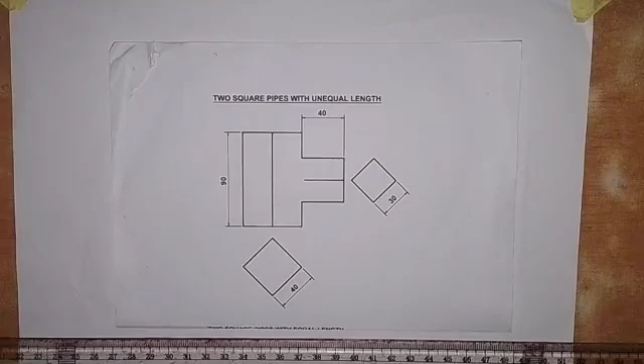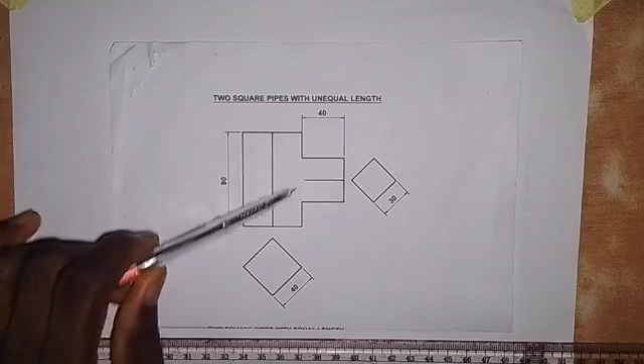Here we are still working on the construction of the line of intersection of two intersecting solids, and for this one we are looking at two square pipes with unequal length. Looking at what we have here, the square end of this vertical square pipe is of length 40 millimeters, while its height is 90 millimeters. For the horizontal square pipe, the side of its square end is 30 millimeters, while its length from here to here is 40 millimeters.

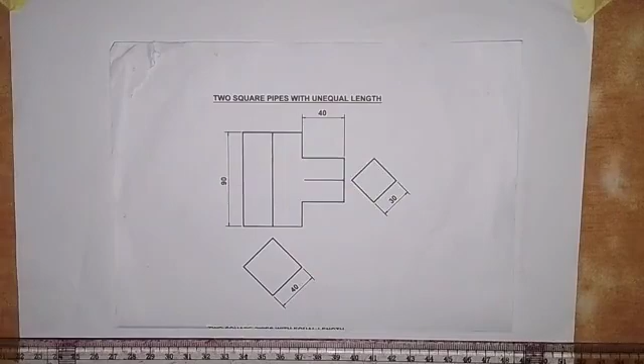So we are going to replicate what we see here, then bring out the line of intersection, and then also complete the plan, because the plan that we see here is that of the vertical pipe. So let's see how we are to draw the line of intersection of these two square pipes.

The first thing we are going to do is draw a vertical center line. Here we have the vertical center line; the center line is drawn with a long chain line. I want to extend it down here. Then we come up here and draw the horizontal center line, which goes like this. I will extend to this side a bit, and then take it to this side. So we have it.

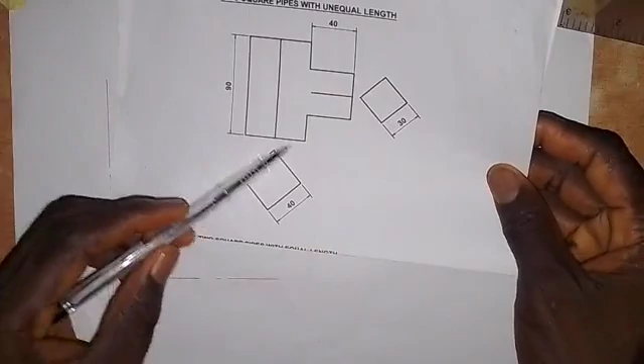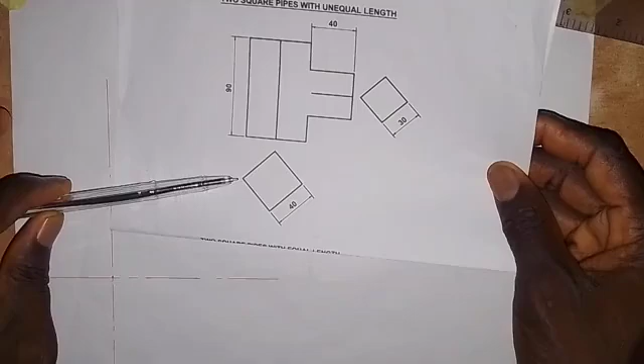The next thing, because of the way this pipe is positioned with the square end like this, for us to construct this square we have to calculate the length of diagonal of this square pipe. I've done something like this several times. What you need to do is determine the length of diagonal from here to here or from here to here; they are equal. To do that, you have to make use of Pythagoras theorem.

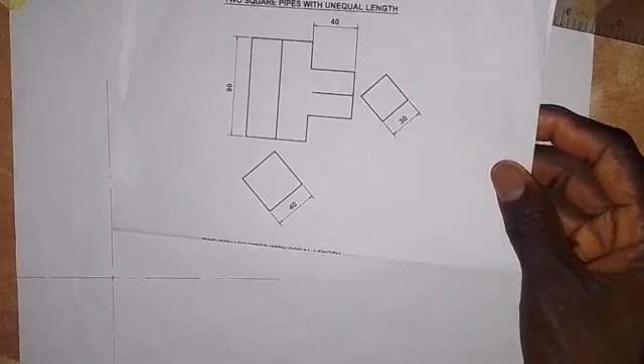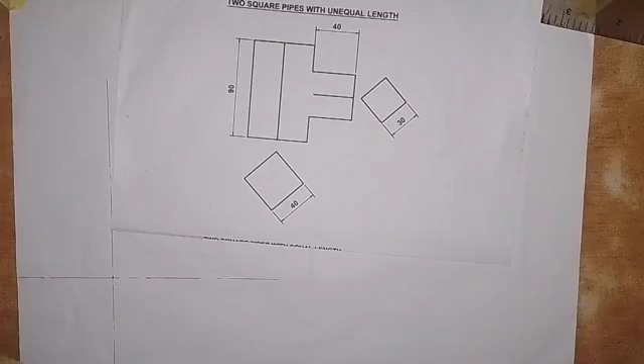So you find the sum of the squares of this length. That is square root of 40 square plus 40 square, and by my calculation that is 56 millimeters. 40 square plus 40 square gives us 3,200, and the square root of 3,200 gives us 56 point something. So just take it as 56 millimeters. That's what we are to use.

Now divide that 56 by 2, and that will give us 28. So we take a measurement of 28 millimeters. Use your compass to take that 28 millimeters, then put the pinpoint here and make an arc here on this line, make an arc here on this line, make an arc down here on this line, and make an arc here.

We are going to join these points together to draw the square end of the vertical pipe. So we join this together, and I will join these 2 points together like this. Then I will also join these 2 points together like this, and these 2 points, I will join them together like this.

If we take a measurement of the distance from here to here, the length of the square end of the vertical pipe, you will see that this is 40 millimeters. That is how simple it is to construct a square positioned in this form. Now the next thing is we come up here, just a little distance up, and draw a horizontal line.

Next, from this point on this square, draw up a vertical line like this. Then we come to this point here and also draw up a vertical line like this. I'm going to extend this up because the height of the vertical pipe is 90 millimeters, so I need to take this up a bit. I also need to take the center line up a bit.

So the next thing that we are going to do is construct the square end of the horizontal pipe; its length is 30 millimeters. So we do the same thing as we did here by calculating the length of diagonal from here to here and from here to here, making use of Pythagoras theorem, and that will be square root of 30 squared plus 30 squared, which gives us square root of 1800. So square root of 1800 will give us 42 point something. Okay, so just take it as 42. So we now divide that 42 by 2, and that will give us 21.

So take a measurement of 21 millimeters on the ruler like this. So here I have 21 millimeters. So put the midpoint here. Okay, we are just drawing only two sides, not the whole of 4. So we just need only 2 of them. So we have this and then we have this. So in this case now, we just want to use this to get what we want.

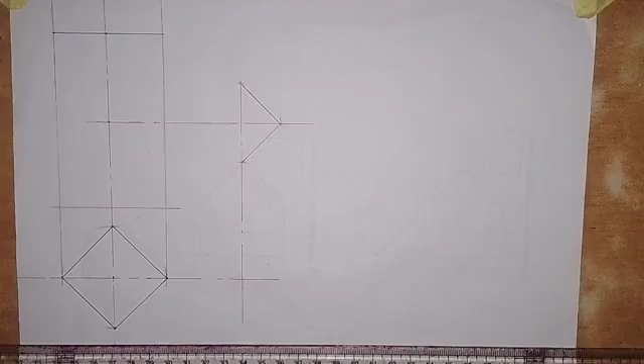I'm just going to join these 2 points together. I'm not going to make it a thick line. Okay, so we just need to join this together like this. Okay, and then we join this also, from here to here. So if you take the measurement from here to here, this is 30 millimeters, as simple as I've done it here. All right, so the next thing that we are going to do is draw a horizontal line from this point.

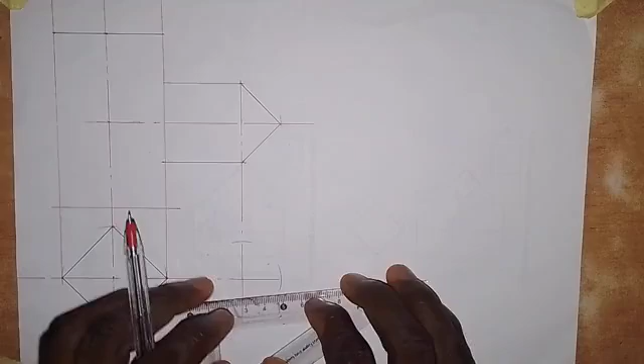We are supposed to repeat the same thing down here, because we also need to make use of this square down here. So let me quickly do it at once. So with the same 21 millimeters, we put the pinpoint here, and then we make an arc here on this line. So we also make an arc here. So I need to extend this line to this side to touch this arc.

All right, so the next thing is I need to draw this line up a bit. Then I'm going to join these points together like this. Okay, so we have this, and then we also join these 2 points together like this. Okay, so we have this now.

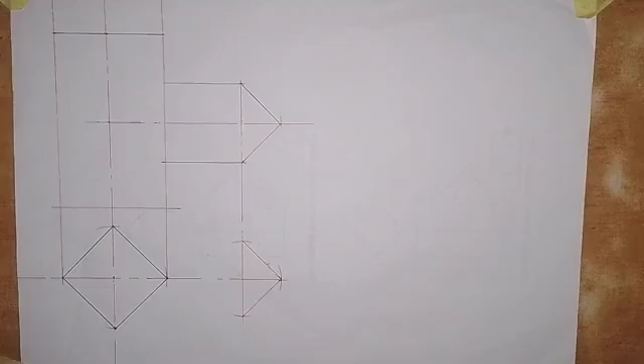All right, so then from this point here, I'm going to draw a horizontal line, making it a thick line at once. And don't forget that these 2 pipes are of unequal length. That means the sides of their square bases are not equal. So that is what we are dealing with here.

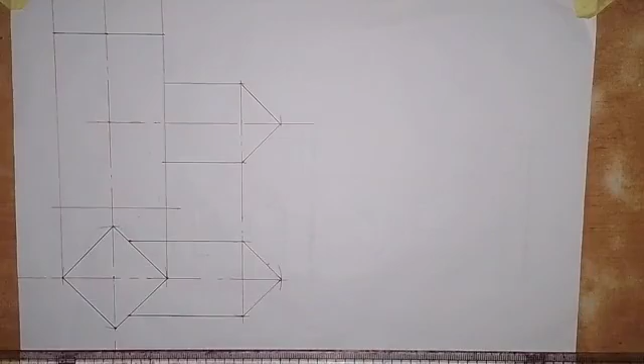All right, so the next thing is that we need to make this line on the vertical pipe a thick line from here down. Okay, and then for this one, we also make it a thick line from here to here, and then we make this also a thick line from here to here. So this base part, we also need to make it a thick line from here to here.

All right, so we have this now. So we are going to make this line a thick line from here to here, and this line also will be a thick line from here to here. All right, so there are other things that we are still going to do, but let's go and do the

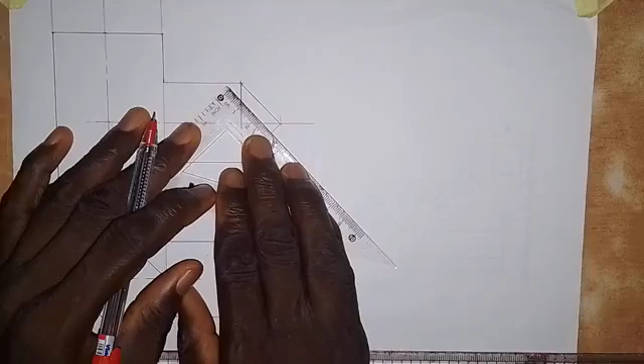next thing here. We are going to divide this distance from here to here into a number of equal parts. Let's divide into a number of equal parts. So this is 21, so it's not something that we can easily divide like that. So I want to divide into 4 equal parts.

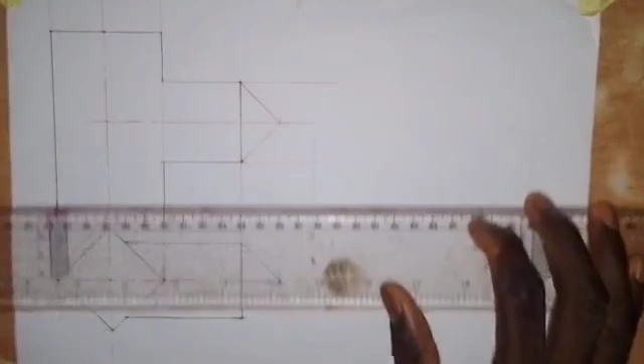Okay, so we draw a horizontal line in this direction to this side, and we also come here. So we draw a horizontal line in this direction to this side. We do the same thing down here. So we draw a horizontal line to this side, and also a horizontal line from here to this side. So I'm going to make 4 equal points on this line. So I'll just make it

5 millimeters each. So this is 1, 2, 3, and 4. And then I'll do the same thing down here. So this is 1, 2, 3, and 4. So I'm going to join the last point with this point here. So we join the last point with this. Okay, so this also we join with this.

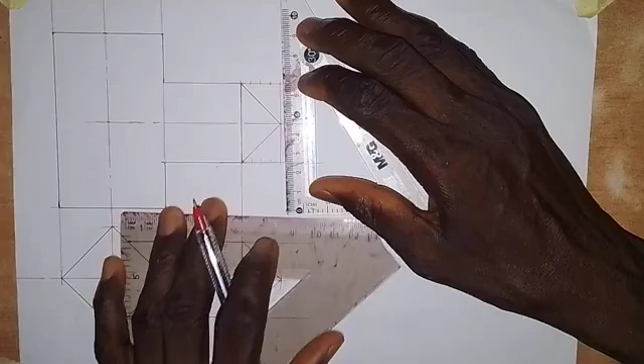Okay, so with my set square here, I will set the set square along this line. The line will fall on the same point, so I can just draw from here to here and from here to here. Then here also I'll do the same thing, so just draw from here to here and from here to here. And then coming to this point here, I'll do the same thing. So draw from here to here and from here to here. Alright, so we have those points.

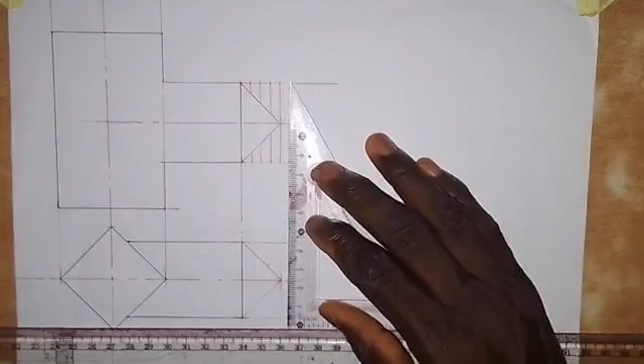So what I'm going to do now is transfer this to the point that we have here, just to do it together at once. Okay, so here I will take this down to this point, and then let me take it down here. And then this point here, I can just transfer it here like this. Then this point also, I'll just transfer it. So draw a line from here to this point and from here down here, and then coming to this point I will draw the line down to this point and to this point.

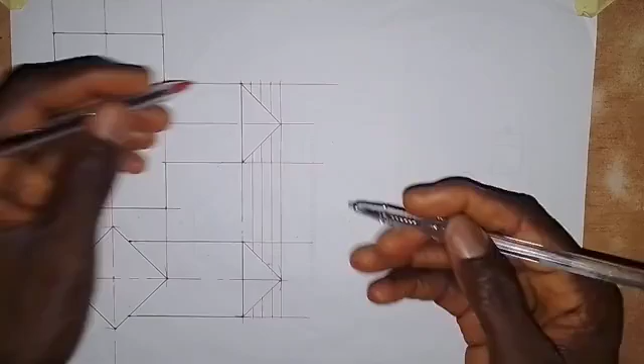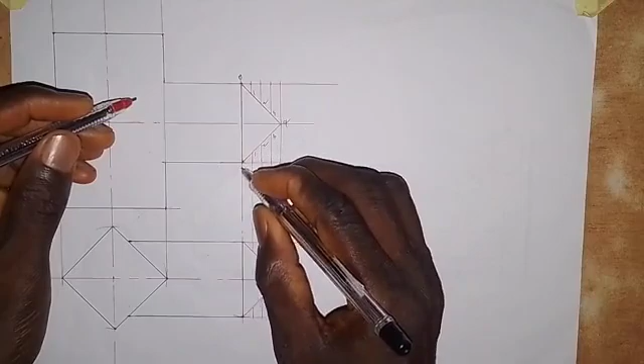Alright, we have this. So we are going to number these points. I'll call this point 0. So this is point 1, this is point 2, this is point 3, and this is point 4. So now this will be 3, this will be 2, this will be 1, and this is 0. Coming down here, we are going to change the numbering. So this is 0, this is 1, this will be 2, this is 3, and this is 4. So this is 1, this is 2, this is 3, and then this is 4. Alright, so we have this.

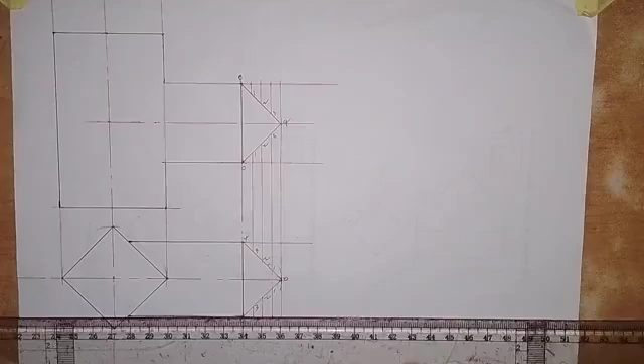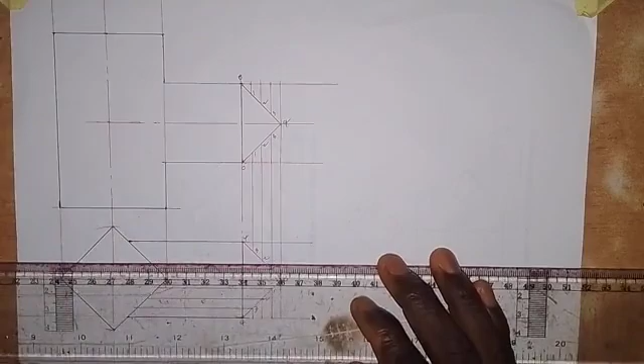So the next thing is that from each of these points on the two sides of the square, we are going to draw a horizontal line to touch the square here. So from this point, I draw a horizontal line to touch the square. Coming to point 2, I will draw a horizontal line to touch the square here, and this point also. Coming up here, I will do the same thing. So draw a horizontal line to touch the square, then at point 2, and then at point 3 I will also draw a horizontal line touching the square here.

Alright, so we have this, and then coming up here I will do the same thing, but in this case I'm going to draw this one entering into the pipe, and then I will draw this also entering the vertical pipe, and then at point 3 here I will draw a horizontal line entering the vertical pipe.

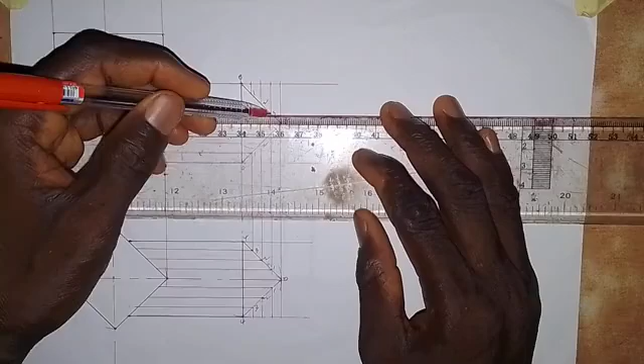Coming up here at point 3, I will draw a horizontal line into the vertical pipe, and then from this point also I will draw a horizontal line entering into the vertical pipe, and then here at point 1 I will draw a horizontal line entering into the vertical pipe. So all these are what we need to do for us to draw the line of intersection of these two square pipes. Alright, so now the next thing that we are going to do is this.

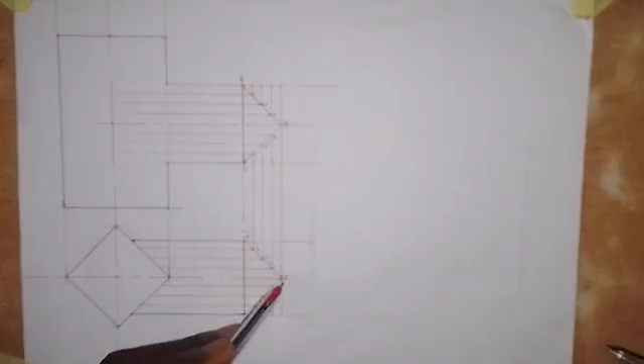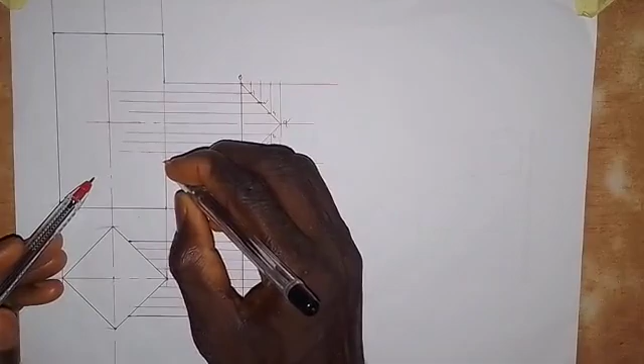If you look at this, we have drawn a horizontal line from point 0 here, so it touches the square at this point, and then we drew a vertical line from that point for 0, and it intersects this line 0 at this point. So let's take note of this. It intersects this horizontal line 0 at this point, and here we also have it intersecting horizontal line 0 at this point. So let's take note of that. And then the next thing that we are going to do is this.

So for 1, this horizontal line 1 touches the square at this point. So from this point we are going to draw a vertical line. We take a vertical line up, so it goes like this. This vertical line that we just drew intersects horizontal line 1 here. So let's take note of this point here, and then it also intersects it at this point here.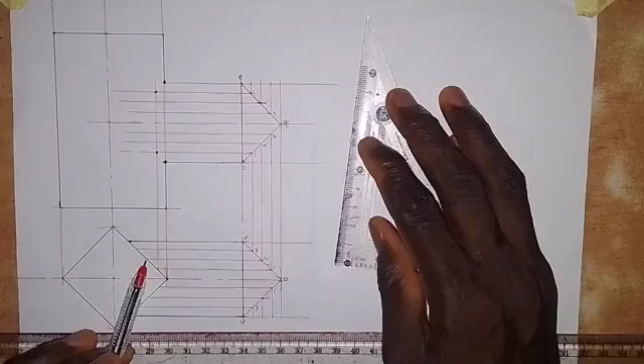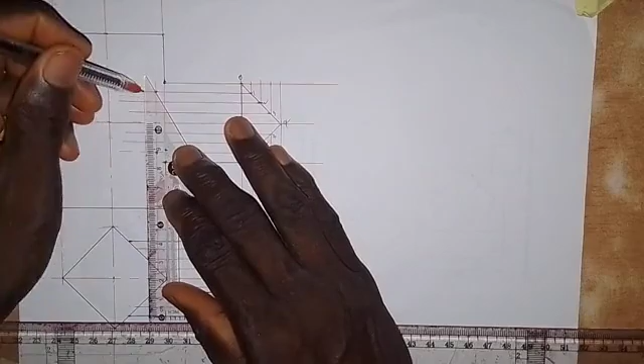Alright, so next we also have horizontal line 2 touching this square at this point. So we come here, and then we draw a vertical line from this point up, which goes like this. So at this point we have vertical line 2 intersecting horizontal line 2 at this point. So here we have this point, and we also have the same point here. So that's for 2. Then we come for 3.

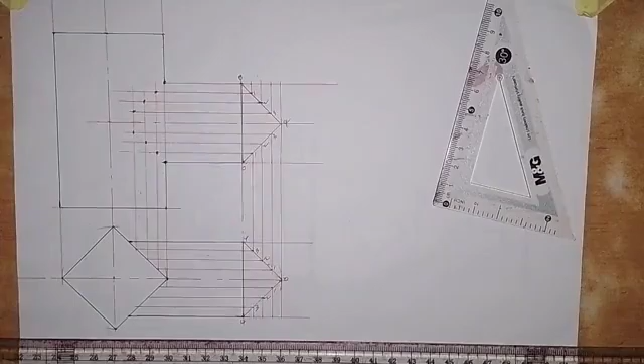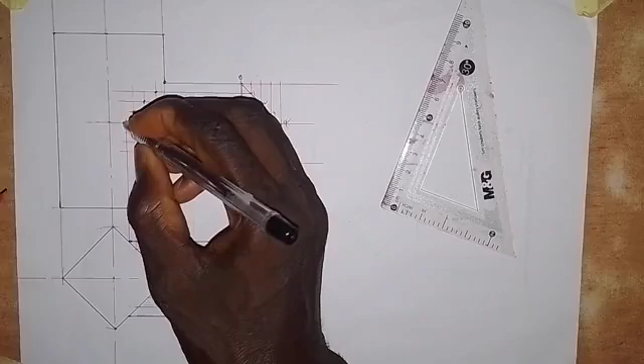So this is horizontal line 3 touching the square here. From this point we draw a vertical line up like this. It intersects horizontal line 3 at this point here, and we also have this intersecting horizontal line 3 at this point. Then the last one is 4. So we come to this point 4, and we draw a vertical line up, which intersects horizontal line 4 at this point here. So here we have this point.

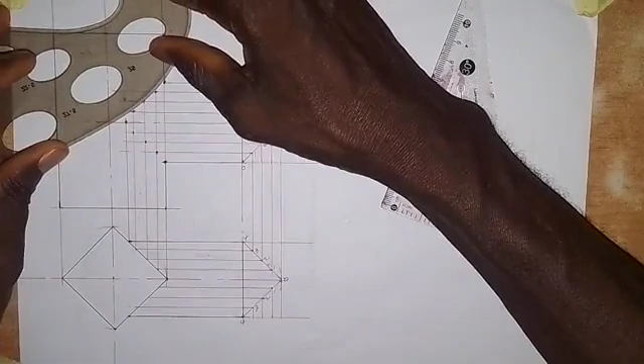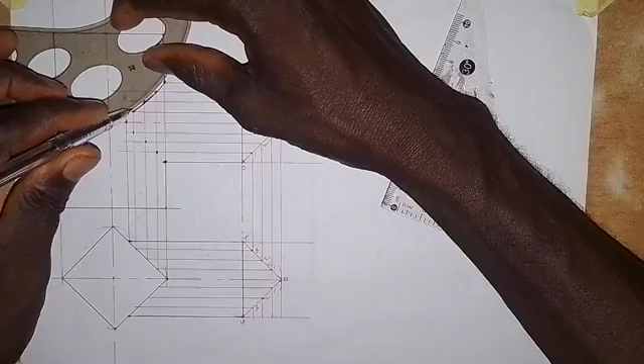Looking at what we have here, it is not actually a straight line. If you look at the way the lines are arranged, it's somehow a curve, a little bit curved. So I'm going to try as much as possible to bring out that shape. I'm making use of my French curve, joining these points together like this. Then let me join this, so we also have this particular one like this.

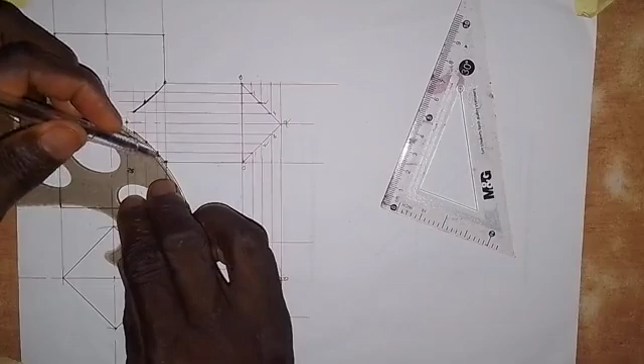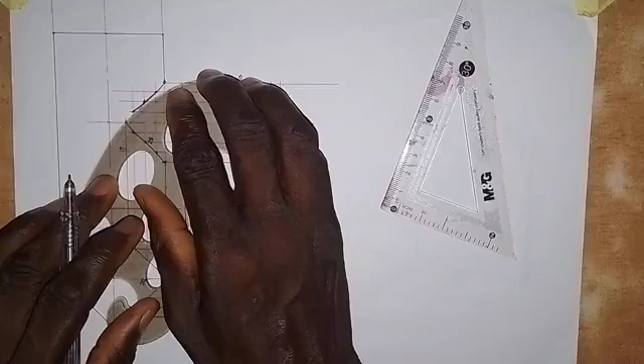So we adjust it, and it's not actually a straight line from what I see. They are not on a straight line. So this point here, I join these points together, and I can also join this together like this. So this is the line of intersection, or the curve of intersection, of these two square pipes.

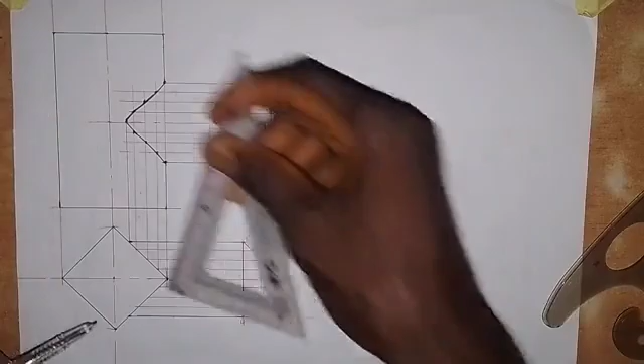Another thing that we need to put here is that we are looking at this square pipe from this point. We can see this corner, which means that this line we have to make a thick line, from here to here. The same thing applies to this one from this point here: you make this line a thick line from here to here, just to touch this line. And we also have the same thing down here. From this point to this point, it will be a thick line.

Alright, so this is the line of intersection of these two square pipes of unequal lengths. As simple as I've done it here, all you have to do is practice. When you practice, you become a master at this work.